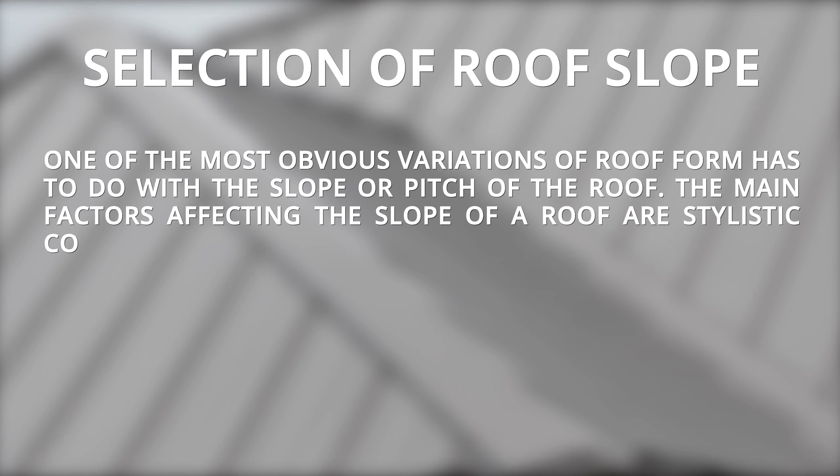Selection of a roof slope. One of the most obvious variations of roof form has to do with the slope or pitch of the roof. The main factors affecting the slope of a roof are stylistic considerations, the type of roofing material to be used, and the space desired beneath the roof.

The climate also has a strong influence on roof slope. Areas of significant rainfall have roofs pitched to shed the rain. Warm, arid climates tend to favor flatter roofs.

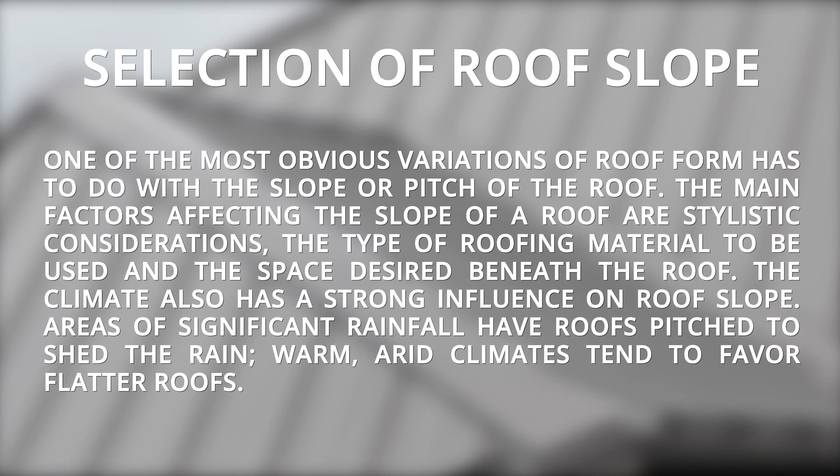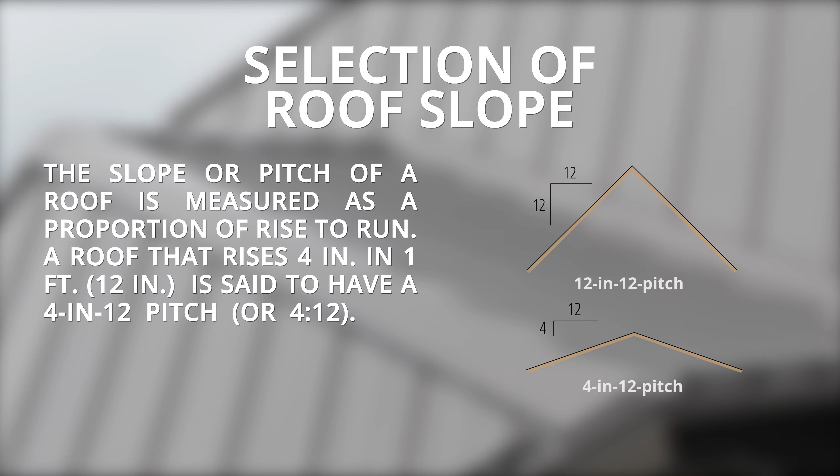Selection of roof slope. The slope or pitch of a roof is measured as a proportion of rise to run. A roof that rises 4 inches in 1 foot, 12 inches, is said to have a 4-in-12 pitch, or 4:12. The second number in the roof pitch proportion is always 12. Take a look at this detailed illustration.

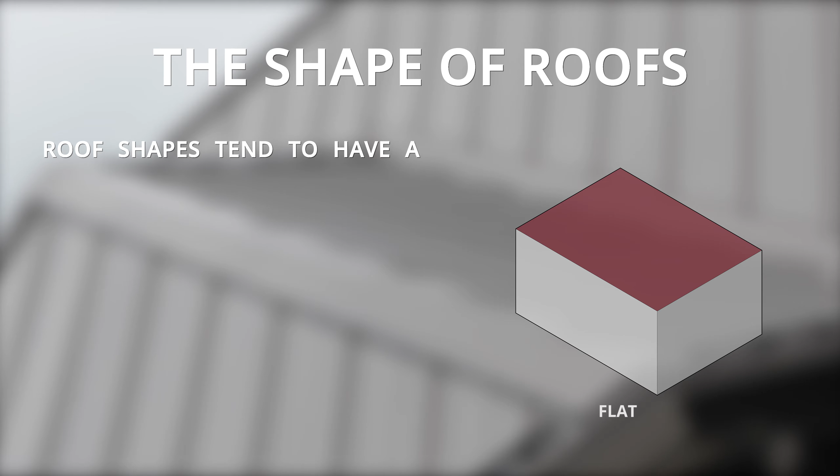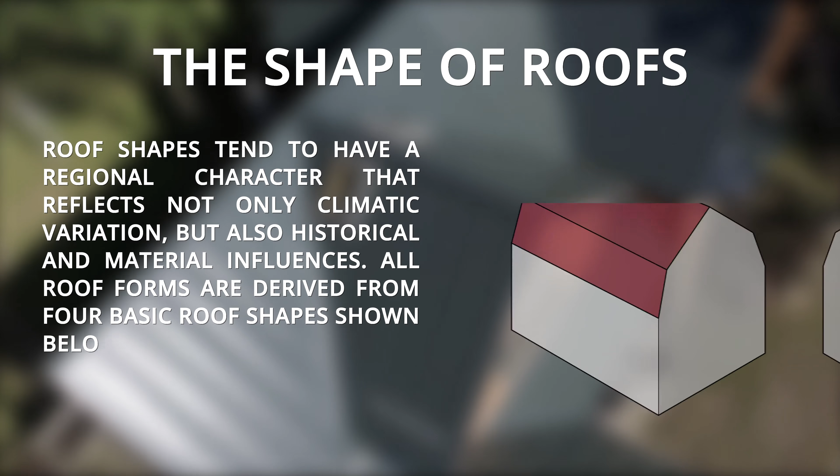The shape of roofs. Roof shapes tend to have a regional character that reflects not only climatic variations, but also historical and material influences. All roof forms are derived from 4 basic roof shapes shown below: the flat roof, the shed roof, the gable roof, and the hip roof.

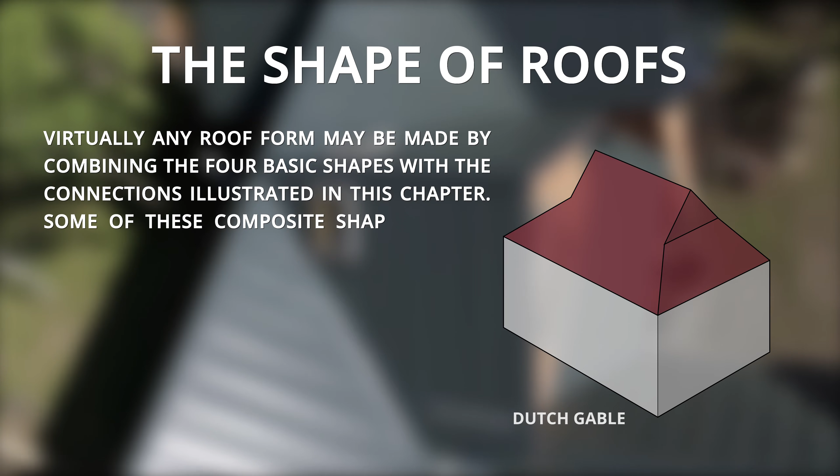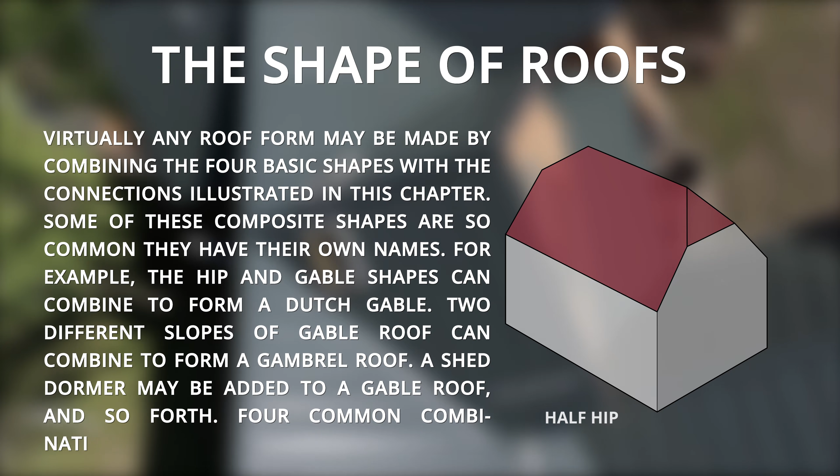The shape of roofs. Virtually any roof form may be made by combining the 4 basic shapes with the connections illustrated in this chapter. Some of these composite shapes are so common they have their own names. For example, the hip and gable shapes can combine to form a Dutch gable. 2 different slopes of gable roof can combine to form a gambrel roof. A shed dormer may be added to a gable roof, and so forth. 4 common combinations are shown above.

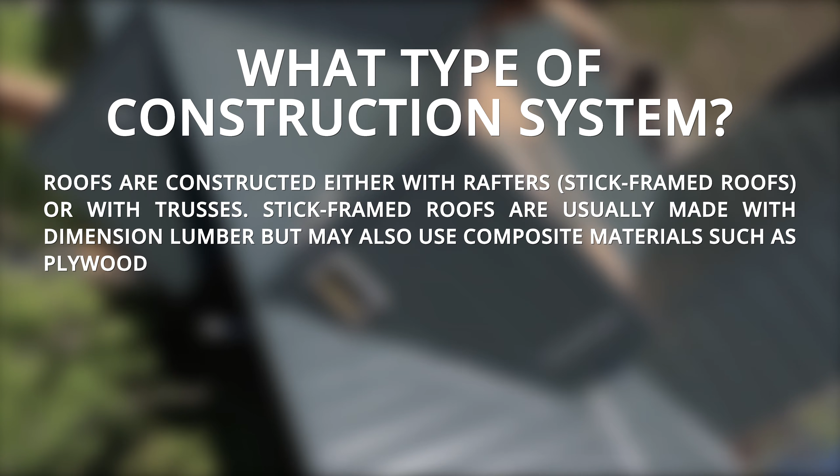What type of construction system? Roofs are constructed either with rafters, stick-framed roofs, or trusses. Stick framed roofs are usually made with dimension lumber but may also use composite materials such as plywood I-rafters, which are simply plywood I-joists.

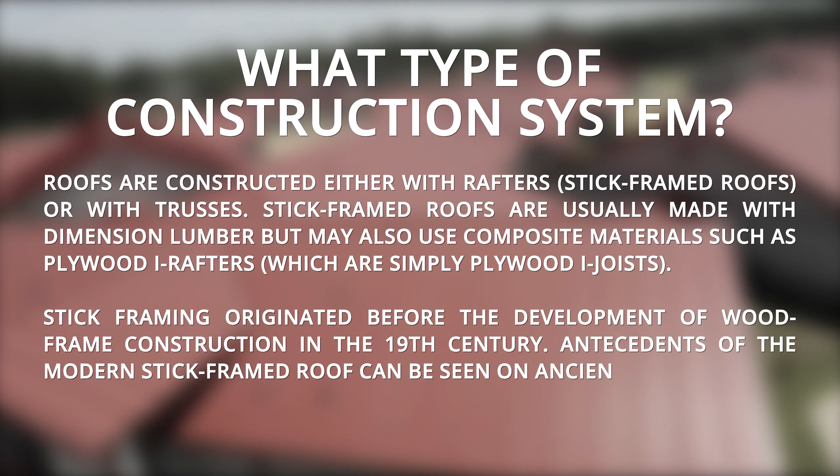Stick framing originated before the development of wood frame construction in the 19th century. Antecedents of the modern stick frame roof can be seen on ancient roofs around the world. And modern stick frame roofing remains popular because it is the most flexible roof framing system and the materials are least expensive.

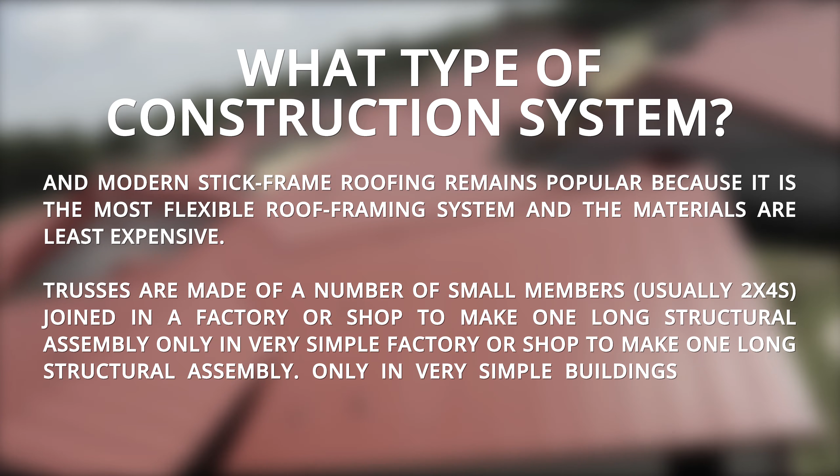Trusses are made of a number of small members, usually 2x4s, joined in a factory or shop to make one long structural assembly. Only in very simple buildings does the labor savings of a truss system compete with stick framing. 2 types of construction system: stick framing, truss framing.

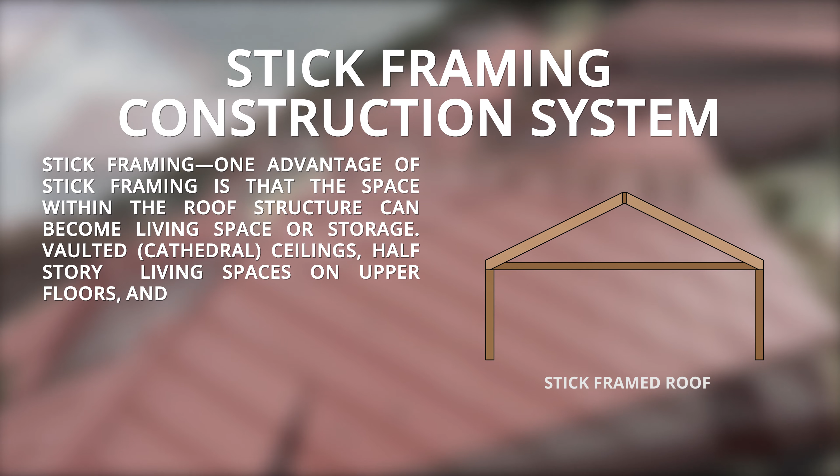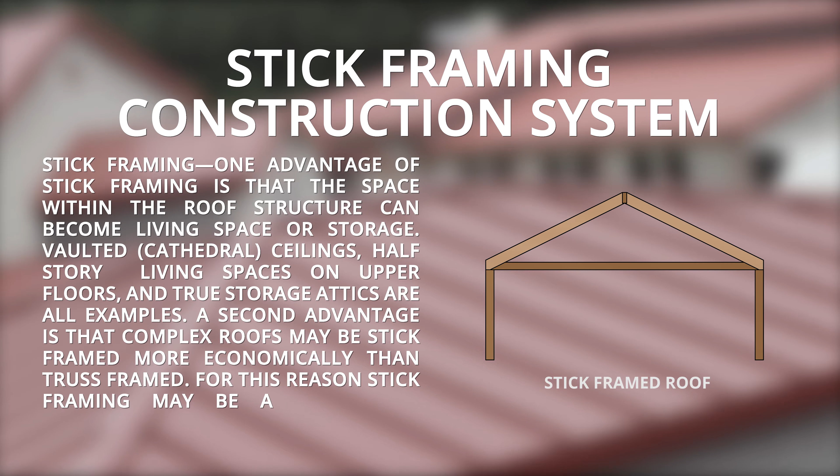Stick framing construction system. One advantage to stick framing is that the space within the roof structure can become living space or storage. Vaulted, cathedral ceilings, half-story living spaces on upper floors, and true storage attics are all examples. A second advantage is that complex roofs may be stick-framed more economically than truss-framed. For this reason, stick framing may be attractive to owner-builders when the cost of labor is not a factor.

Truss framing construction system. Trusses can span much farther than stick-framed roofs, leaving large open areas below them or permitting partition walls to be relocated without consideration for the roof structure above. Trusses go up quickly, usually resulting in a cost saving over stick-frame roofs on simply shaped buildings. A big disadvantage of trusses is that the truss roof is almost impossible to remodel, since trusses should never be cut.

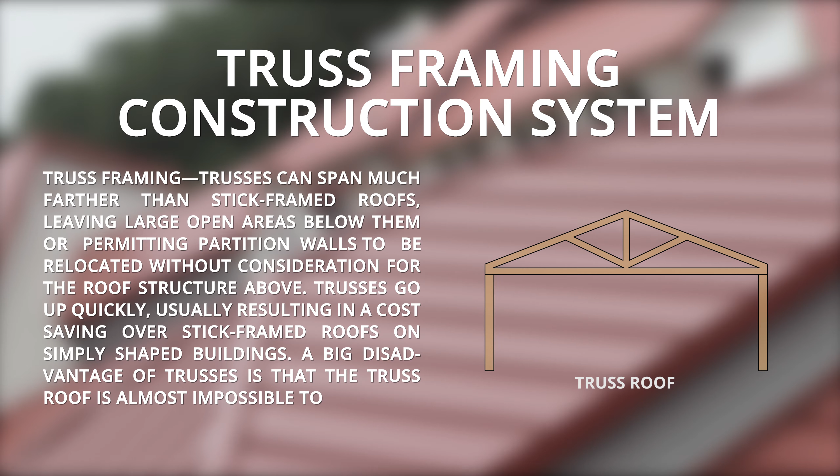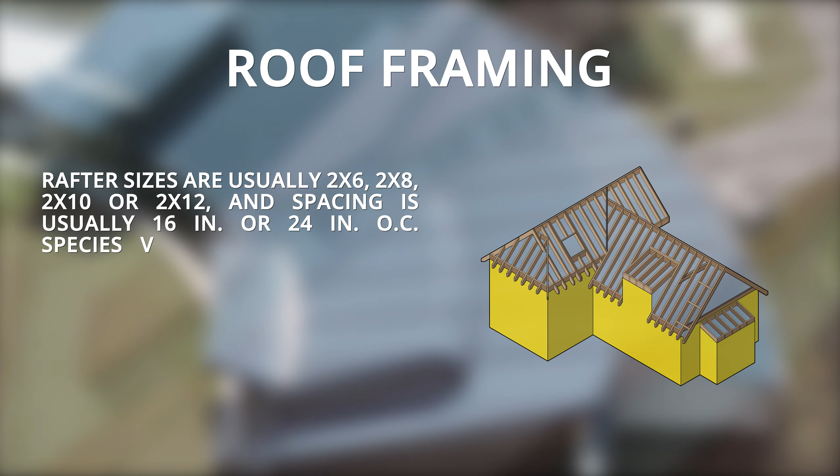Roof framing. Rafters are usually 2x6, 2x8, 2x10, or 2x12, and spacing is usually 16 inches or 24 inches on-center. Species vary from region to region. Rafter sizing depends primarily on span, spacing, roof loads, and sometimes on required insulation depth.

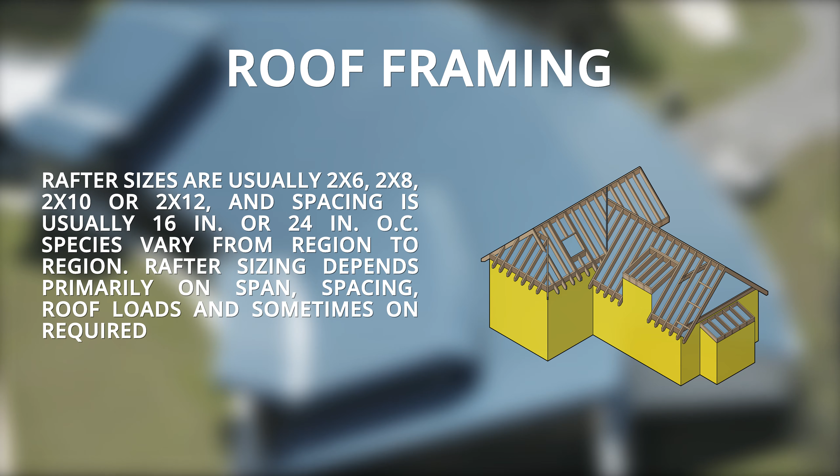Stick framing. Stick frame rafters may be supported by the walls of the building, by a structural ridge beam, or by purlins.

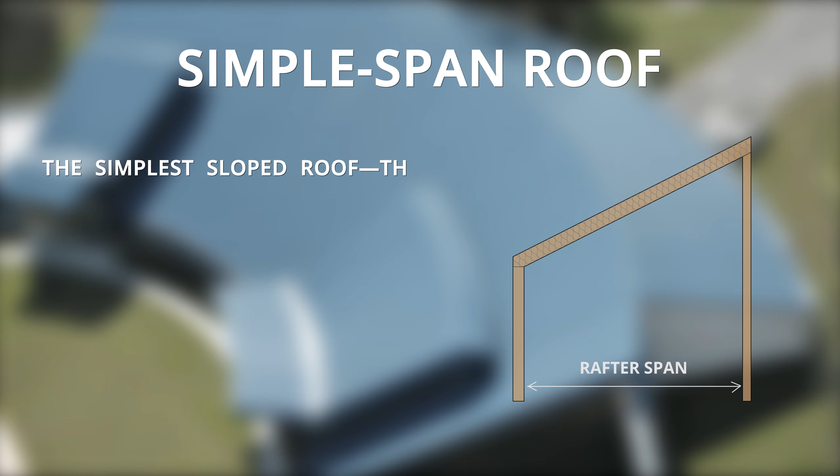Simple span roof. The simplest sloped roof, the shed roof, has rafters that span from one wall to another. These rafters must be strong enough to carry the dead load weight of the roof itself and subsequent layers of re-roofing, plus the live load weight of snow. The rafters must usually be deep enough to contain adequate insulation.

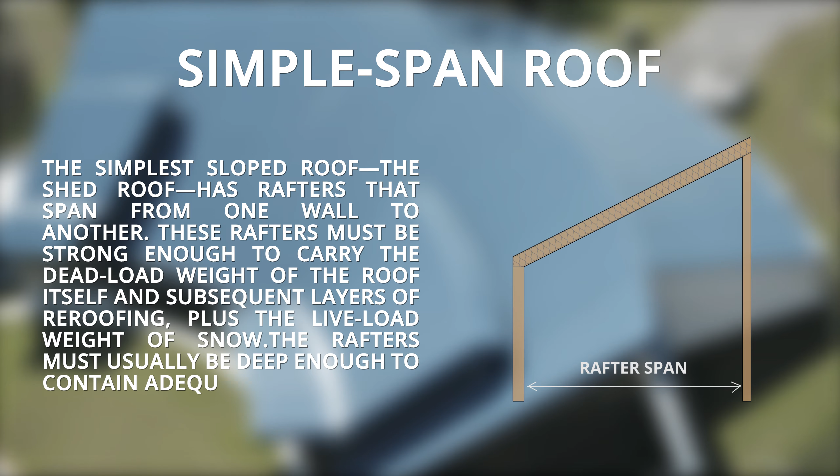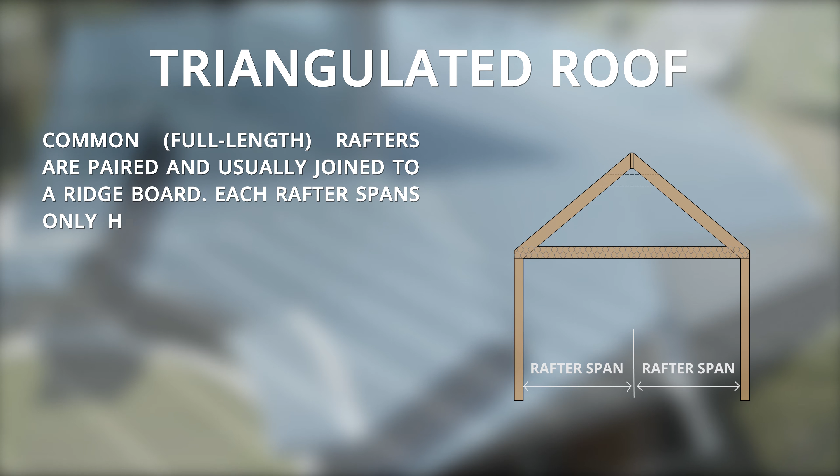Triangulated roof. Common full-length rafters are paired and usually joined to a ridge board. Each rafter spans only half the distance between the two walls. Horizontal ties, either ceiling joists or collar ties, form a triangle with the rafters. Ceiling joists are generally located on the top plate of the walls but may also be located higher to form a partially vaulted ceiling.

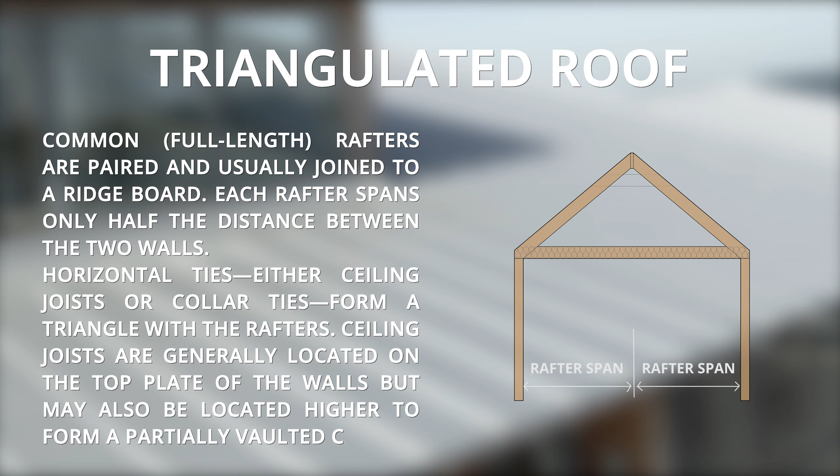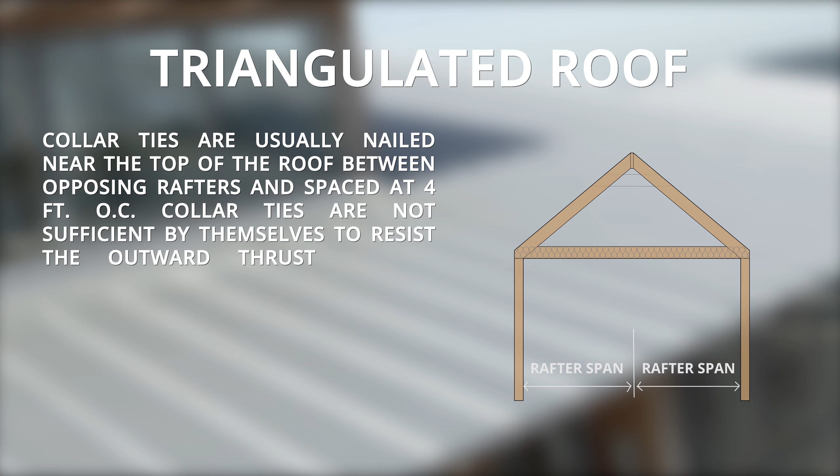Collar ties are usually nailed near the top of the roof between opposing rafters and spaced at 4 feet on center. Collar ties are not sufficient by themselves to resist the outward thrust of the rafters. Rafters in triangulated roofs are shallower than those in shed roofs of equal width because they span only half the distance of the shed rafters and because they do not usually contain insulation.

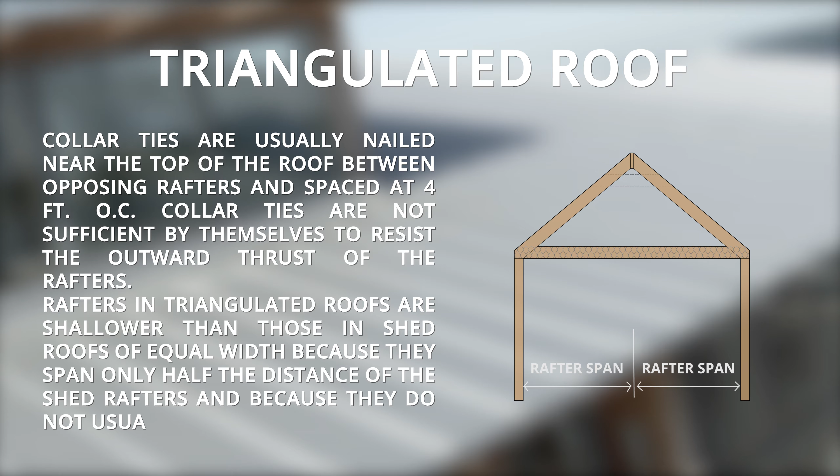Structural ridge beam. The horizontal ties that are required in a triangulated roof may be avoided if the rafters are attached at the ridge to a structural ridge beam or wall, which effectively changes the triangulated roof into two simple span roofs.

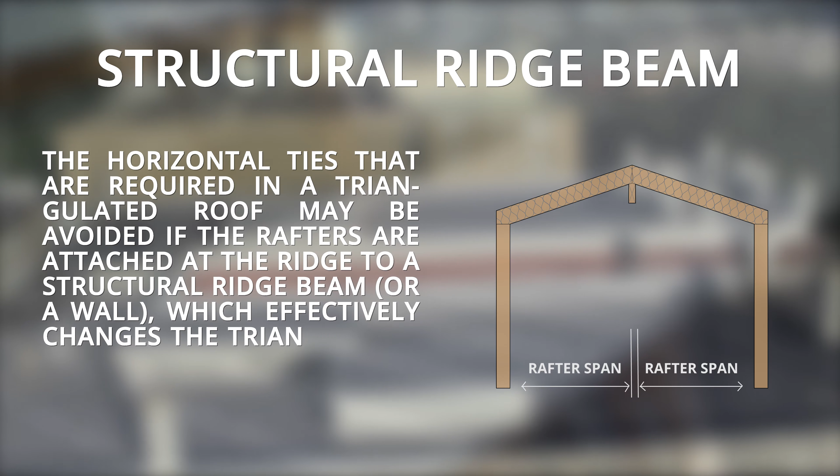Purlin. A horizontal member that supports several rafters, usually at mid-span. Purlins were commonly used to help support the long, slender rafters of pioneer houses and barns. Today, they are also used occasionally to reduce the span of a set of rafters, but the purlins must themselves be supported by the frame of the structure. Note, the name purlin is also given to a member that spans across rafters to support roof decking.

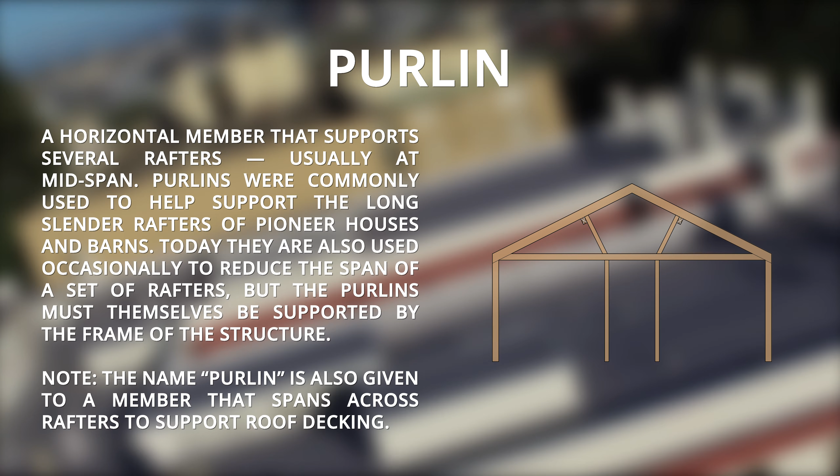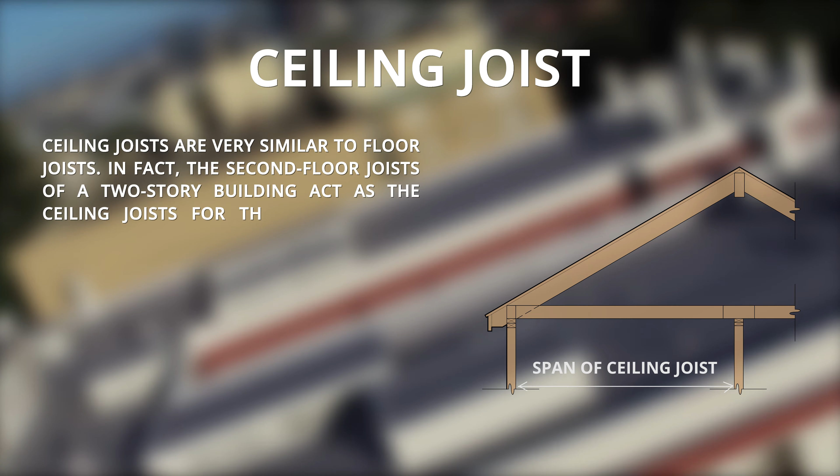Ceiling joist. Ceiling joists are very similar to floor joists. In fact, the second floor joists of a two-story building act as the ceiling joists for the story below. Ceiling joists are distinguished from floor joists only when there is no floor, except an attic floor, above the joists. Ceiling joists are sized like floor joists. The span of the joist depends on spacing and whether the attic above the joist will be used for storage.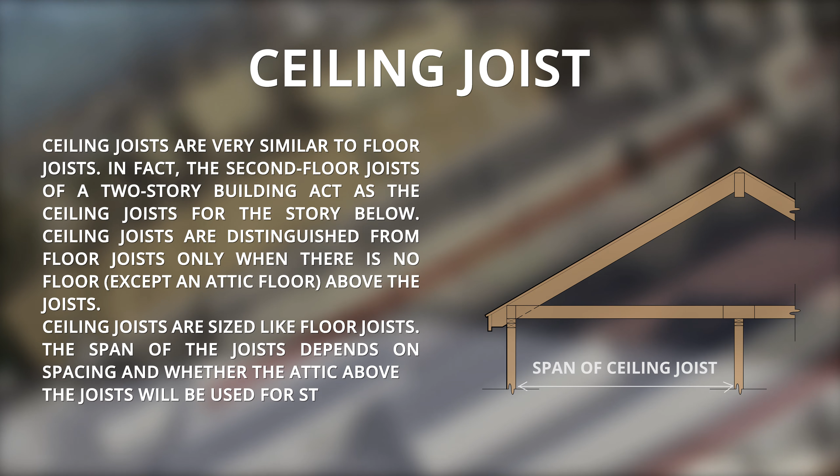Types of roof framing: valley framing, hip framing, flat roof framing.

Valley framing. The inside corner of two intersecting roof planes is called a valley. There are three types of valley framing: valley rafters supported by ridge, valley rafters supported by header, and farmer's valley. Valleys are supported by a valley rafter that extends from the outside wall of the building to the ridge or to a header. These valley rafters support large loads and should be engineered. Jack rafters support the area between the valley rafter and the ridge or header.

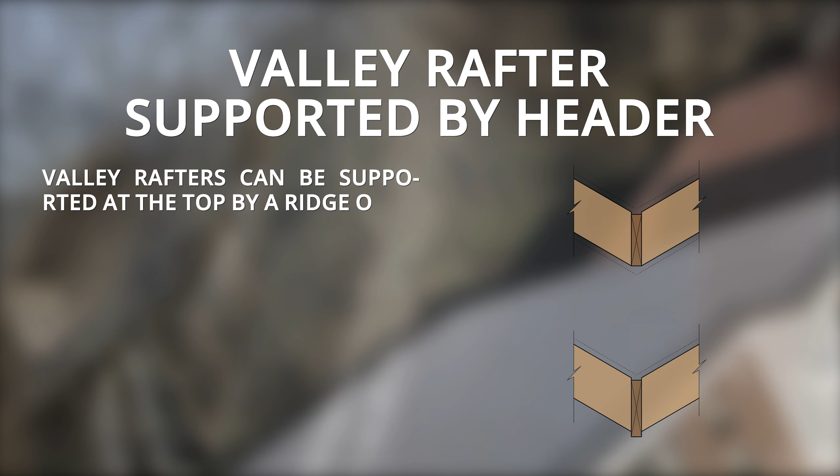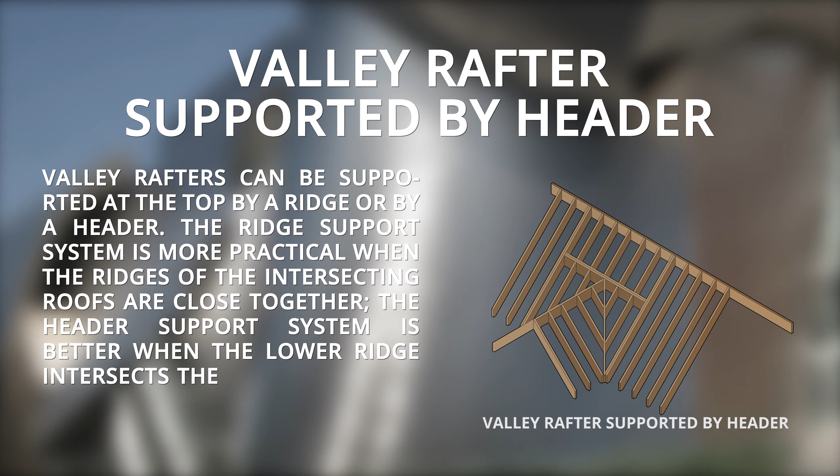Valley rafters supported by header. Valley rafters can be supported at the top by a ridge or by a header. The ridge support system is more practical when the ridges of the intersecting roofs are close together. The header support system is better when the lower ridge intersects with the main roof near or below the center of the rafter span.

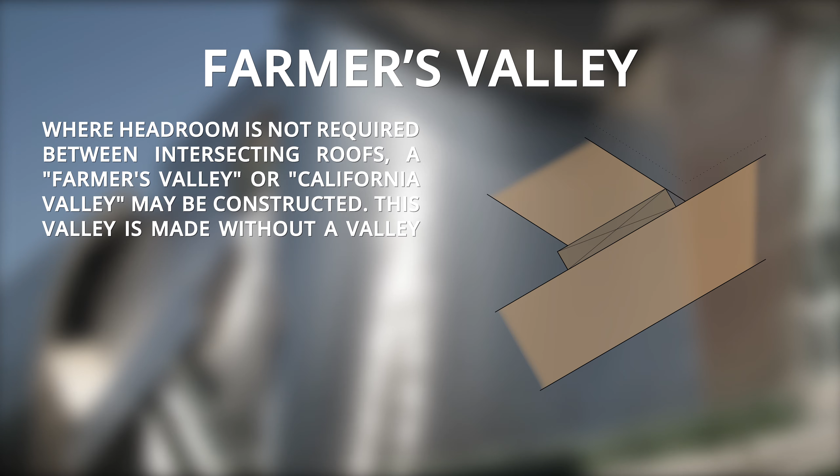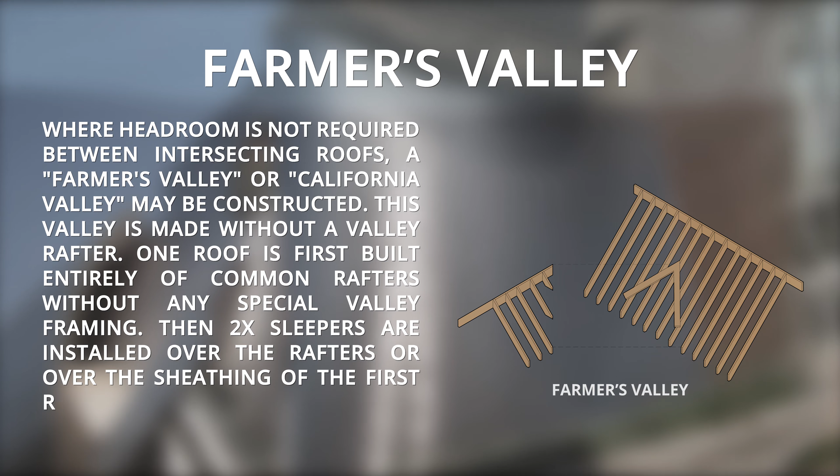Farmer's valley. Where headroom is not required between intersecting roofs, a farmer's valley or California valley may be constructed. This valley is made without a valley rafter. One roof is first built entirely of common rafters without any special valley framing. Then 2x sleepers are installed over the rafters or over the sheathing of the first roof, and jack rafters are attached to the sleepers.

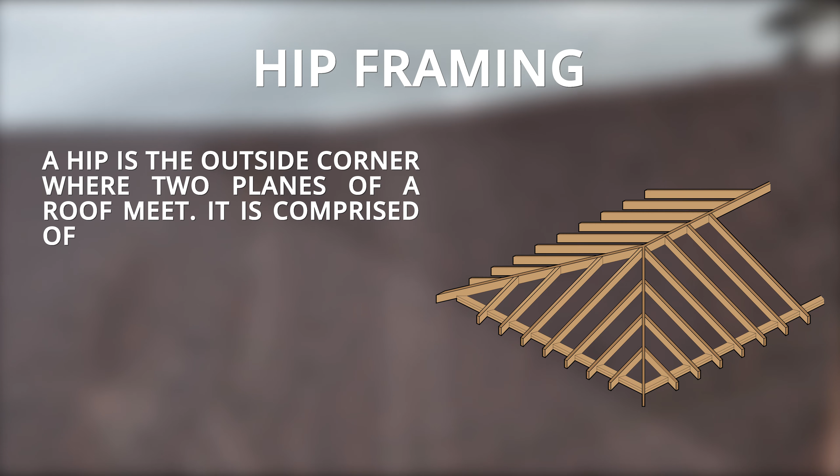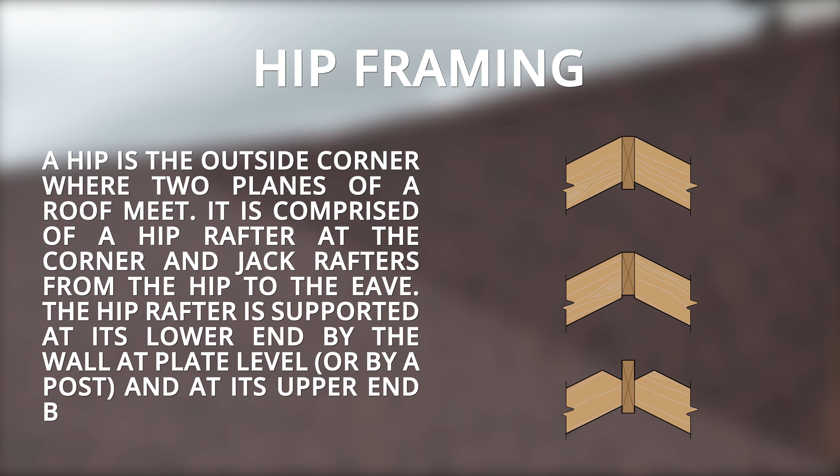Hip framing. A hip is the outside corner where two planes of a roof meet. It is comprised of a hip rafter at the corner and jack rafters from the hip to the eave. The hip rafter is supported at its lower end by the wall at plate level or by a post, and at its upper end by the ridge or by a wall.

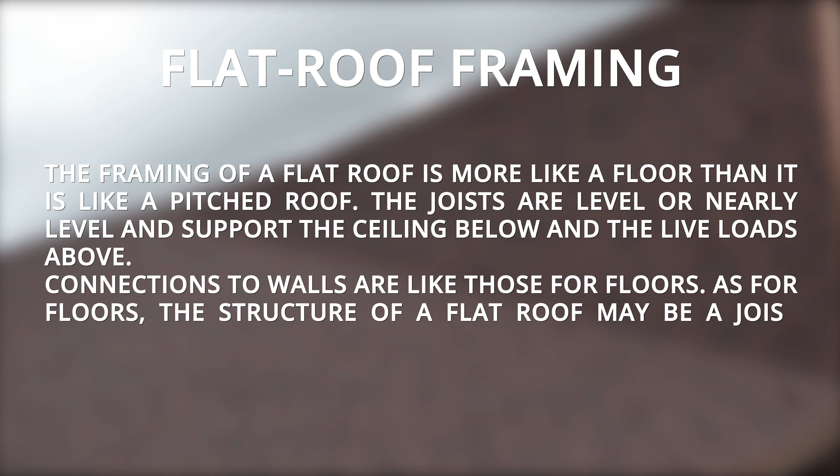Flat roof framing. The framing of a flat roof is more like a floor than it is like a pitched roof. The joists are level or nearly level and support the ceiling below and the live loads above. Connections to walls are like those for floors. As for floors, the structure of a flat roof may be a joist system, dimensional lumber or laminated, a girder system, or a truss system. Blocking and bridging must be considered at the appropriate locations.

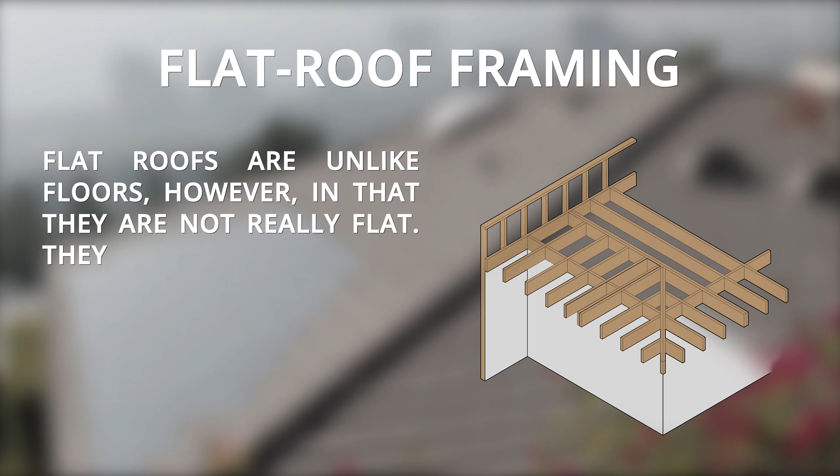Flat roof framing. Flat roofs are unlike floors, however, in that they are not really flat. They might be more properly called low-slope roofs because they must slope at least a quarter inch per foot in order to eliminate standing water.

Eaves and rakes. Designing the basic shape of a roof and designing the configuration of eaves and rakes are the most critical tasks in roof design. Stylistically, the selection of eave and rake types should complement both the roof form and the roofing material. Functionally, the eave and rake should help protect the building from the elements. The shape of the roof will suggest certain eave or rake shapes, and certain eave types work best with particular rake types.

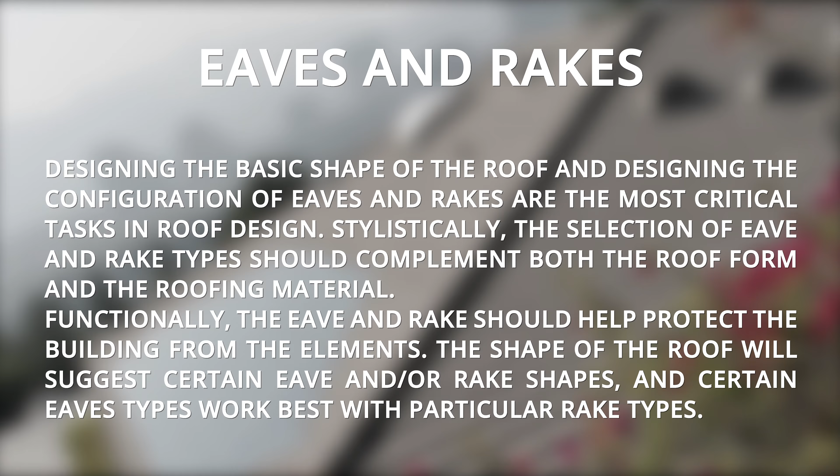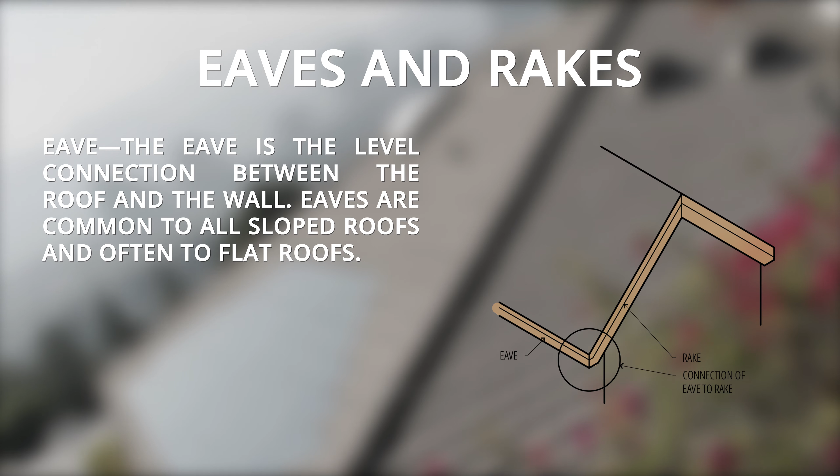Eaves and rakes. Eave: the eave is the level connection between the roof and the wall. Eaves are common to all sloped roofs and often to flat roofs. Rake: the rake is the sloped connection between the roof and the wall. Only shed and gable roof types and their derivatives have a rake.

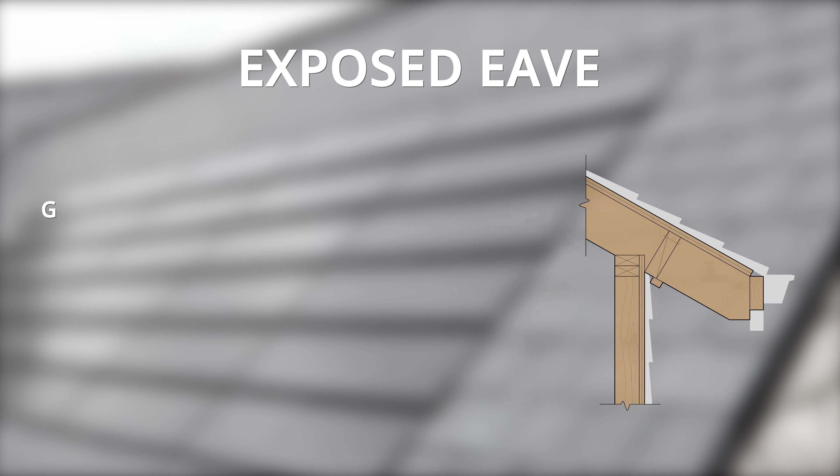Four basic types of eave: exposed eave, soffitted eave, abbreviated eave, and boxed-in eave. Exposed eave goes with shed, gable, and hip roofs equally well. Soffitted eave works best on hip or flat roofs with no rake, and is also used on gable roofs as well.

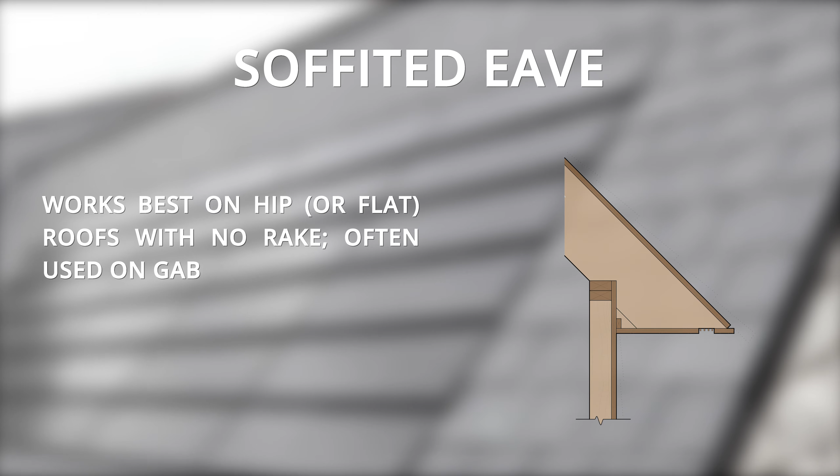The abbreviated eave goes well with shed, gable, and hip roofs equally well. The boxed-in eave also goes with shed, gable, and hip roofs equally well.

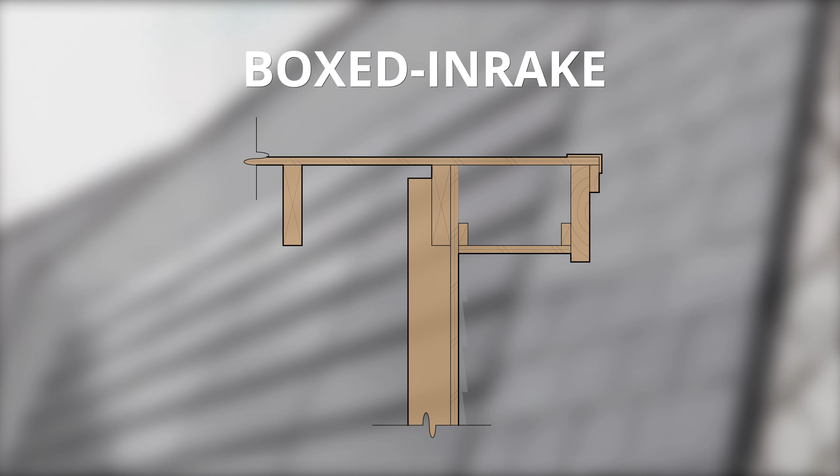Plywood I-rafters. The lightweight, strength, precision manufacturing, and long lengths that make structural plywood and other composite framing materials appropriate for floors. I-rafters are generally stiffer and stronger and can span farther than dimensional lumber rafters of the same size, but they can also cost more, and their appearance is not satisfactory if exposed.

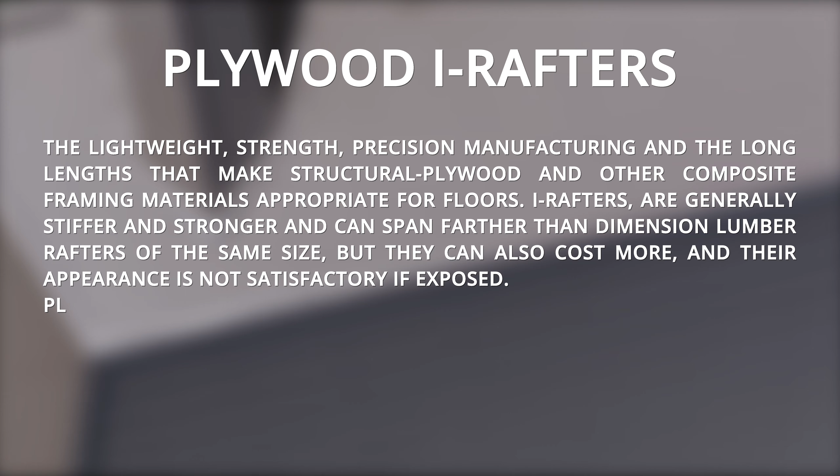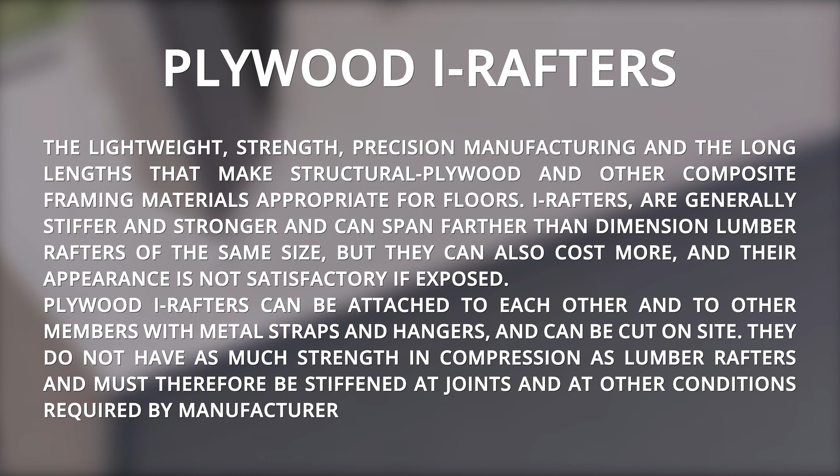Roof trusses, like floor trusses, are a framework of small members, usually 2x4s, that are connected so that they act like a single large member. There are five types of common roof truss: king post truss, scissor truss, mono-pitch truss, Fink truss, and parallel chord truss.

King post truss: the simplest truss, which can span about 25 feet. Please reference this detailed illustration. Scissor truss: the sloping bottom chords of scissor trusses can increase interior volume, with spans up to 40 feet possible. Please reference this detailed illustration.

Mono-pitch truss: a mono-pitch truss for shed roof buildings spans about 25 feet. Fink truss: spans over 40 feet. Parallel chord truss: parallel chord trusses are for flat roofs, with standard spans available up to 30 feet.

Roof sheathing attaches to the surface of the rafters or trusses to form the structural skin of the roof. It spans the rafters to support the roofing, and in the case of panel sheathing such as plywood, acts with the wall to resist horizontal loads. Roof sheathing material must be coordinated with the roofing itself, since each type of roofing has special requirements.

There are two basic types of sheathing: solid sheathing and open sheathing, also called skip sheathing. Solid sheathing provides a continuous surface at the plane of the roof. This type of sheathing is necessary for composition roofing and built-up roofing, which have no structural capacity themselves. Metal, tile, and shingle roofing may also be applied to solid sheathing.

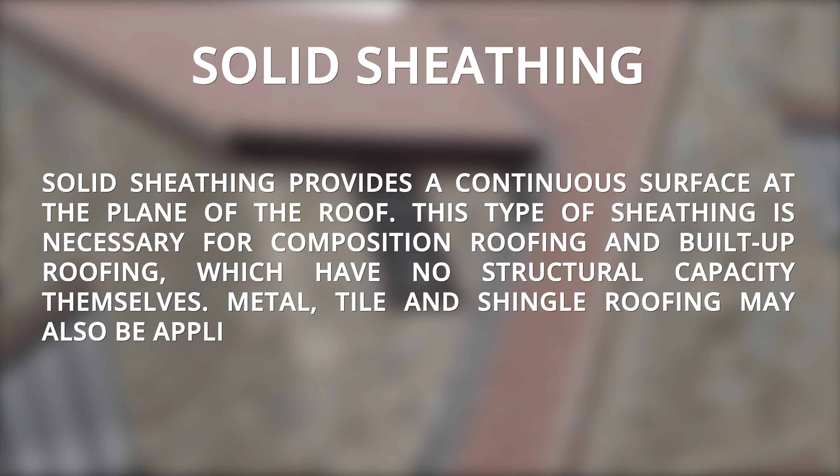Open sheathing, also called skip sheathing, is composed of boards spaced apart. This type of roof sheathing is used under wood shingles and shakes, which usually require ventilation on both sides of the roofing material. Open sheathing may also be chosen for economic reasons, but only if used with roofing systems such as metal and tile, which have the structural capacity to span between sheathing boards.

Solid roof sheathing: plywood and non-veneered panels. Panel installation: low cost and ease of installation make plywood and non-veneered composite panels the sheathing of choice for most modern roofs. The system provides a structural diaphragm and is appropriate for all but wood and shake roofing, which requires ventilation.

The standard panel size is 4 foot by 8 foot, so rafter or truss spacing that falls on these modules is most practical. Care must be taken to protect panel edges from the weather by the use of trim or edge flashing. Sheathing at exposed overhangs must be exterior or exposure 1 rated panels and must be thick enough to hold a nail or other roof fastener without penetration of the exposed underside.

Solid roof sheathing, exposed T&G decking. T&G sheathing, decking, is also used for exposed ceiling applications. It can be used selectively at exposed eaves or overhanging rakes. Rafters are spaced at wide centers since the decking will span more than 24 inches in most cases.